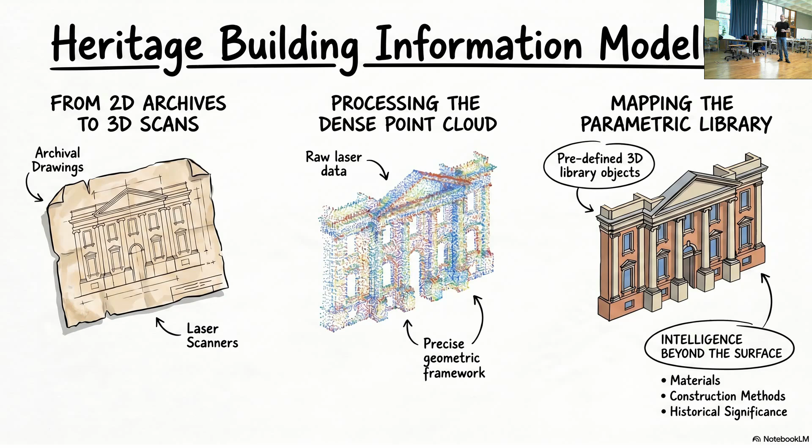So basically we have two-dimensional archives, like drawings, and 3D scans using raw laser data like point cloud. We basically turn it into predefined three-dimensional library objects. So we create a parametric library, and then we add materials, construction methods, historic significance—those kinds of things—into the model.

So let's start. As you know, standard BIM methodology has digital representation capabilities, so we use it to document, conserve, and manage historic structures. So what do we need to do with a historic building? We need to document—capture what is there. Also, we need to find out information about that.

For instance, for the Faculty of Architecture building—this is a relatively old building now, 60 years old—we can go and find the drawings, we can go and scan the building, and create documentation out of the existing building. Then we can figure out what we need to do to conserve its current state, and how we can manage the building so that in the future it will last longer. That's the idea.

So with standard BIM, we have the digital representation of the physical and functional characteristics of buildings. We define the size of elements, mention the materials, and represent the building digitally in a way that follows a standard format. And it's used for decision making—BIM is all about decision making, in the construction process or prior to it.

That's custom mapping. Normally, what they do with laser scanning—for instance, Kemal Abi or Filiz Hoca—they do laser scanning, and with it they create two-dimensional drawings. That's all they can do now. This is what we are trying to avoid, right? With BIM, we don't want 2D drawings. They are useful, they are good, but it's not what we want.

They basically create a laser scan, then they take slices. So they take a slice at 1.2 meters to draw a plan. They take a slice to draw an elevation. Or, in the best case, they use that scan to create a 3D view, a 3D model.

But a 3D model is only an empty shell. It's not something that is enriched like we do in BIM. They capture surface geometry without underlying data. You capture the surface, but you don't know what is behind that skin. You create a 3D skin out of points, but you don't know what's behind, and you don't care about it in traditional historic documentation.

This is not what we want. With Heritage BIM, we create smart parametric objects, digital elements. They're defined and altered by specific parameters and behavior rules, the same as with BIM. We create a wall, we create a window, and they are parametric. They work as they should.

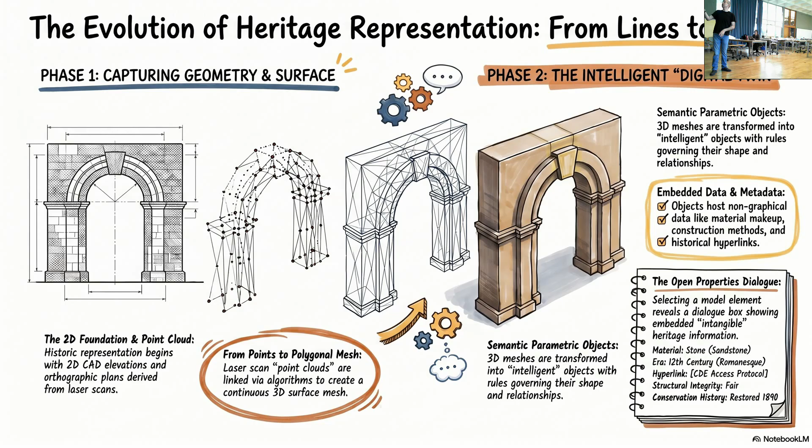Basically, the Heritage BIM model becomes a central collaborative repository, which means that with the Heritage Conservation Project, we have many partners, many stakeholders. We have engineers, historians, architects, restoration professionals, many different people. We have the public, the Ministry of Culture, the municipality, the general public - they are all involved.

We basically create a spatial model, like the geometry, but we relate it to other pieces of data, like the history. So it is also a federated model - exactly, but now we are not federating the structural engineer, mechanical engineer, we are federating, for instance, oral history - people telling their experience about the space, video recordings, sound recordings, posters from events happened in that location, drawings. There are all kinds of different data. So we still have data, but it's different - it's about the history in this case.

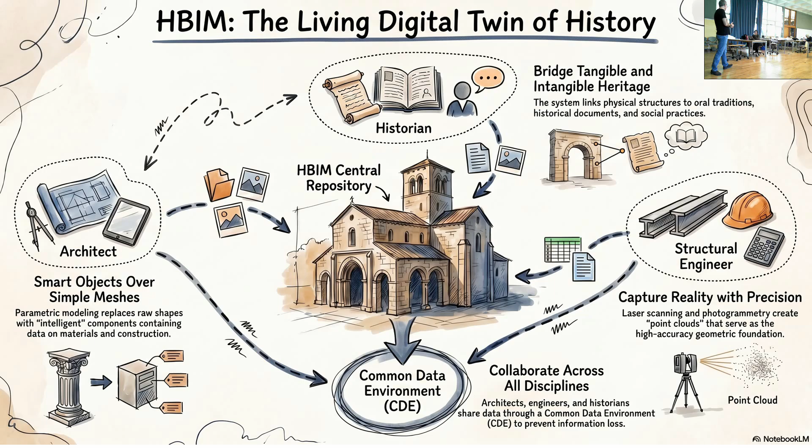But the common data environment for Heritage BIM is not that standard. There are many different Heritage BIM projects ongoing all around the world, and everyone is trying their own way of doing it. Because it's a very niche, new area, people are programming their own common data environments.

And of course, we want to use it for long-term life cycle management of the buildings. The Heritage BIM model can be used for preventive maintenance, energy efficiency retrofits, or if there is going to be a physical intervention, we can use the Heritage BIM for that.

Also, the structural deformations, we can follow them, like what's happening in time. How do these pathologies change in time?

This is what we do in the summer. In Italy, I run a summer school with some friends from Italy and Spain. Every summer we take one building and we focus on what's happening with that building, with the structural concrete, and how it deforms in time. Then students, like last summer Eleanor was there, basically look into using those observations and convert them into a BIM model. This is something that I also show in the tutorial.

So it's useful because we can also use it for virtual tours. Now, because we have internet, we don't have to rely on people coming and visiting in person. We can convert all our cultural heritage because it's environmentally better actually.

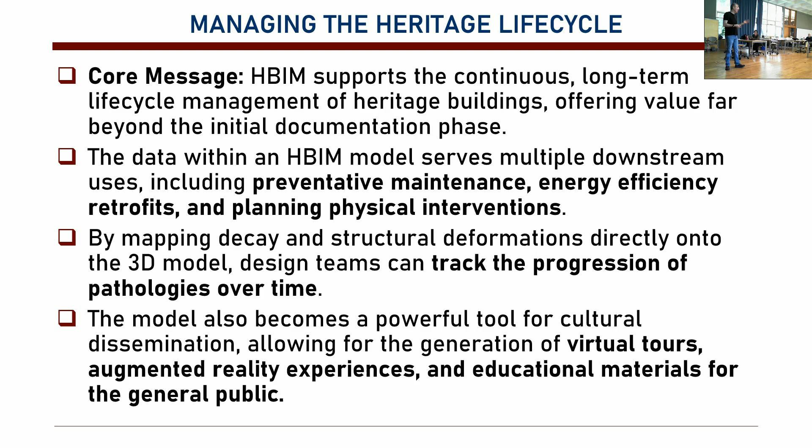So education, materials for the general public. The general public needs to be fed. So this is what we want.

So we basically scan, we do basic data capture, we do diagnosis, we make predictive modeling out of that, we do intervention planning, we do maintenance tracking through the life cycle, and then we also do cultural dissemination. This is what we call it, with the virtual reality, with the 3D models, with the websites, there are all kinds of ways to do that.

So the common data environment in that case basically turns tangible geometry and intangible history into something that supports the survival of the building. That's the idea. But of course, the way we do Heritage BIM is challenging.

We also need to train professionals, because when you think of the standard BIM libraries, they are standard. You cannot just put a regular window in an old heritage building model, because it will not fit. So the standard BIM libraries lack the complex heterogeneous components, which means that we need to create custom parametric families from scratch for heritage BIM.

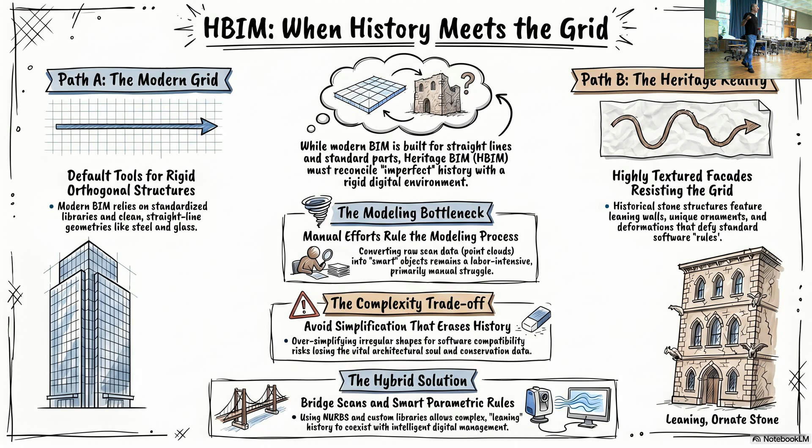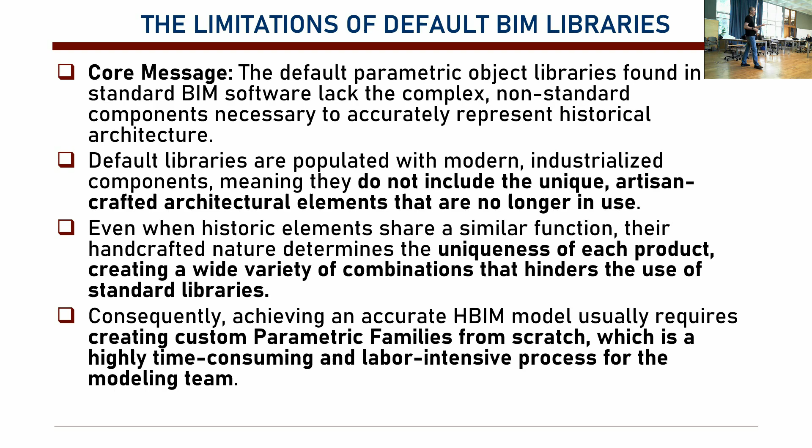This means that when you scan and receive data—let's say there's a timber beam, a timber post, an adobe brick wall—someone should be modeling it piece by piece. Modern buildings are straight and nice, but heritage buildings are complex. We need to deconstruct them piece by piece and simplify. For each unique element, we need to create a custom parametric family, and this is the difficult thing with heritage BIM. With regular BIM, you simply define dimensions, etc. With heritage BIM, you need to figure out how it's going to work.

So you don't have a Corinthian column head. It needs to be somehow turned into an object which is parametric. Sometimes this is the difficult part, but this is why this is a very important field. We have some AI algorithms, but they don't really work correctly, so we need to find ways to simplify this. People are still researching, so if you're interested in historic buildings, this could be a field for you to stay relevant in terms of technology.

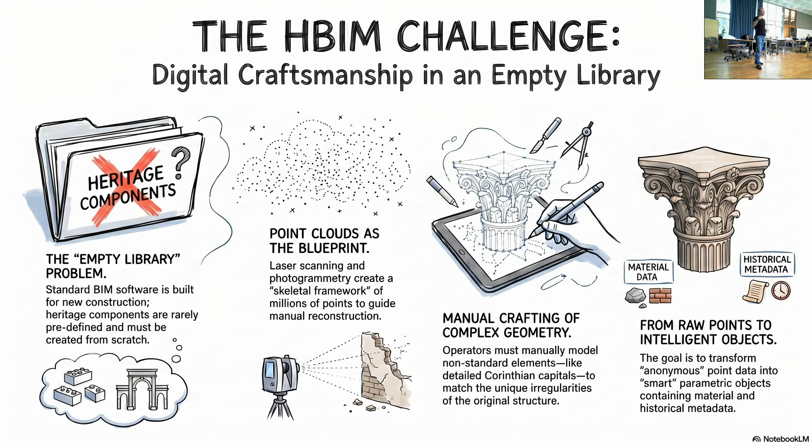That is, for instance, creating that complex but parametric representation of the actual point cloud. Most BIM software have very simple 3D geometry tools, as you know with Revit, and we sometimes use other software. But we basically try to idealize things in that regard. It's difficult, so we have to figure it out.

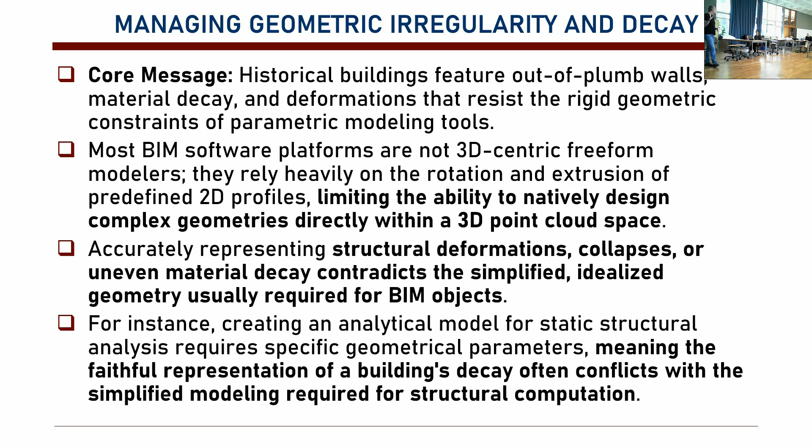So this is the reality. We don't want to put it that way, but it could be something like this, for instance, something in between, middle, hybrid ground. Because this is the actual building, this is the actual wall. The point cloud gives us a perfect image, but we cannot simply say there is a simple wall, because it erases the historic value. We don't want that.

But we want to find a middle ground, because we cannot put it like this into the BIM. This is the middle ground. How do we find the hybrid middle ground? With extreme geometric accuracy, we cannot do that. Oversimplifying is also a problem. So we need to find the intended uses of the model.

The question is, what should it be? Could it be just a simple wall like that, or could it be like this, or something in between? How do we define that? We need to be able to define that. Level of information need here is important. We have to define it.

Do we look for semantic richness? Do we want geometric accuracy, high fidelity, or do we want parametric behavior? There are these three different use needs, and we have to balance all that. Sometimes maybe the semantic content is more important, so a simple representation is okay. But let's say it is...

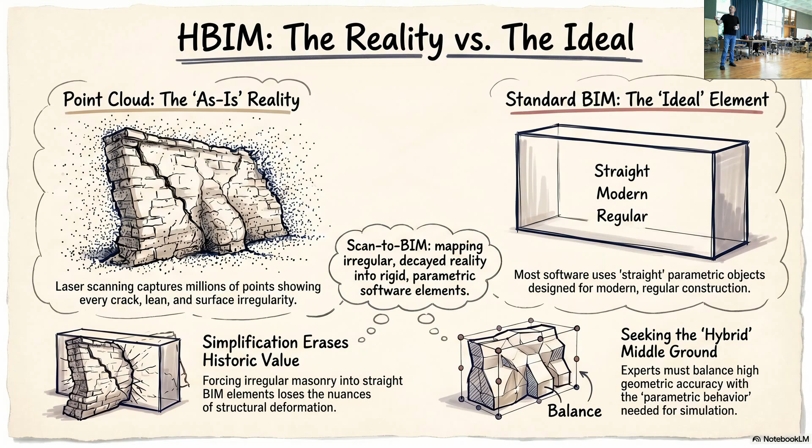Rhino, right? You can use Rhino to model that wall and then bring it to Revit. So your laser scan feeds Rhino. Rhino is used for simplifying geometry - there are many algorithms that can create meshes out of point clouds. Then you can simplify those meshes, turn them into this blocky representation. This one has something like 200 faces instead of millions of points - 100 faces is okay, 200 faces is okay. Then you create that in Rhino as NURBS, and bring it into the BIM environment for heritage work.

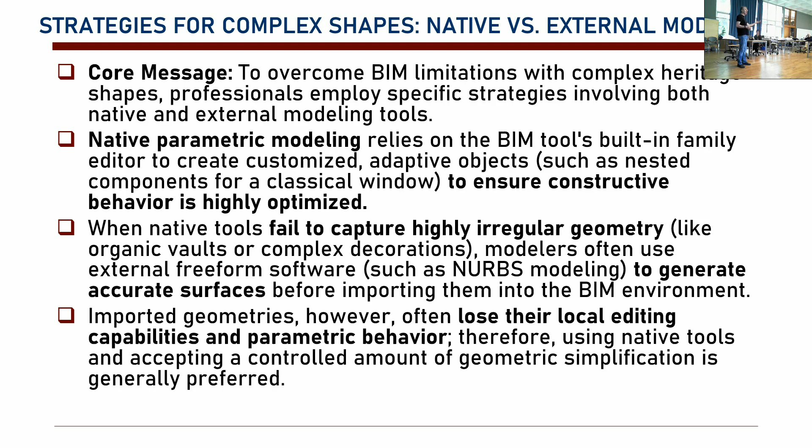But the problem is, if you bring it there, you cannot edit it anymore in Revit. So this is the issue - it becomes a fixed element. But the question is, are you okay with that? You might say, well, I have the workflow fixed, and I can just continuously create all kinds of objects, bring them into Revit, and then put the wall property into that object. It becomes a wall. I can put the material of that object there, and it just works. Why not? Because with native parametric modeling, you can only do a few things with the wall.

But with NURBS modeling, you can do all kinds of things with the wall. Then you bring it to the model, but it's locked.

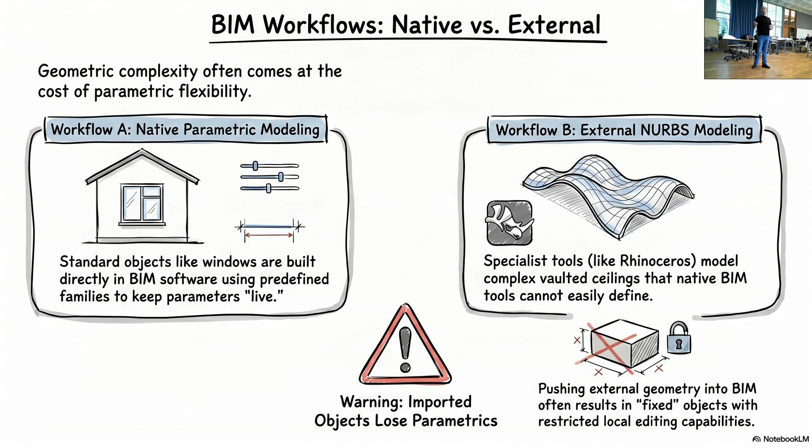That's the idea, okay? Now let's talk about reality capture. Reality capture is, of course, why we can do this. Without reality capture, we wouldn't be able to talk about heritage BIM, okay?

It's not new. I remember very well when I was a student in the US, in year 2003, I was at a conference and they were showing us how we could use a laser scanner to capture spaces, and they were working on how to convert that laser scan into a model. That was like 23 years ago. I don't know, you weren't born.

2003, okay, yeah, 2003 they were doing that, which means that we basically collect first the legacy data. We collect data about the building. We look into archival documents, like old drawings, blueprints, historic accounts. This is important because we want to figure out what happened so far.

Like we have this mosque, and we know that it was initially a temple, a Roman temple. That Roman temple turned into a church, then it was turned into a mosque. So then we have these time milestones in the life of that.

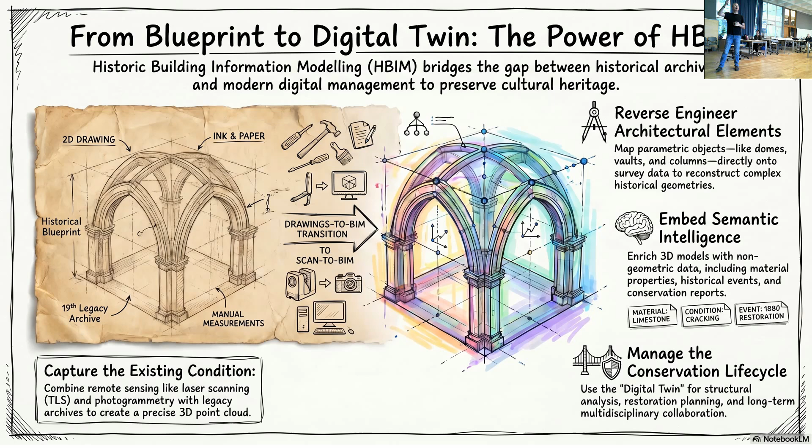Okay, of course we use terrestrial laser scanning (TLS), because it gives us a millimeter level 3D model. We have point clouds, and that point cloud accurately maps the complex irregular surfaces on the building. Perfect. But the problem is with the laser scanning.

The limitation is you need line of sight. So if you want to scan this room, especially this waffle slab, you want to be able to see every point inside that, which means you cannot have one laser scan from one room. We want to have 1, 2, 3, 4, 5, 6, 7, 8 - like this room needs at least 8 to be able to see everything. Even then, you won't be able to see everything. What, for instance? These pipes - you cannot see the top of these pipes because they just cannot work.

So this is a problem, and also, of course, it's expensive. A laser scanner costs like, I don't know, 100,000 euros today, 300,000 euros - millions of Turkish liras. And you need not just a scanner, you need a very high capacity, high capable computer with a very high-end graphics card, CPU, memory, etc., storage space. And then, of course, you need time, and you need trained people. So it's very expensive.

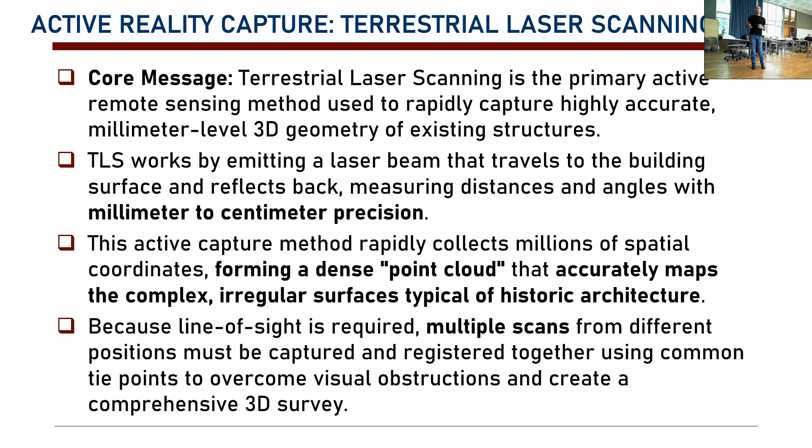So what is the alternative? Yeah, this is how the laser scanner works, right? So the laser scanner sends a laser beam, then it measures the distance. Remember I showed you my - do I have it here? I think I have it.

Just wait. Yeah, this is a very simple laser scanner. See that? So it is like a laser pointer, but this is a laser one-point scanner. Because it takes - now it measured 4.55 meters. So a laser scanner, the way it works is...

it takes millions of measurements, 360 degrees. It turns around, takes millions of measurements with a device like that. This works with - there are two different technologies, time of flight, and what was the other one? I forgot. And the scanner works that way. So it basically, you can measure - with this one I can measure even that, 15 meters from here. So it takes like a 100 meter long shooting of laser beams, and then millions of measurements captured into a single file.

That file we call a station. So every point where you take millions of measurements is a station. And you take like 5, 6, 10 stations, and then the computer matches these points with each other, relatively to each other. Then it places them in 3D space.

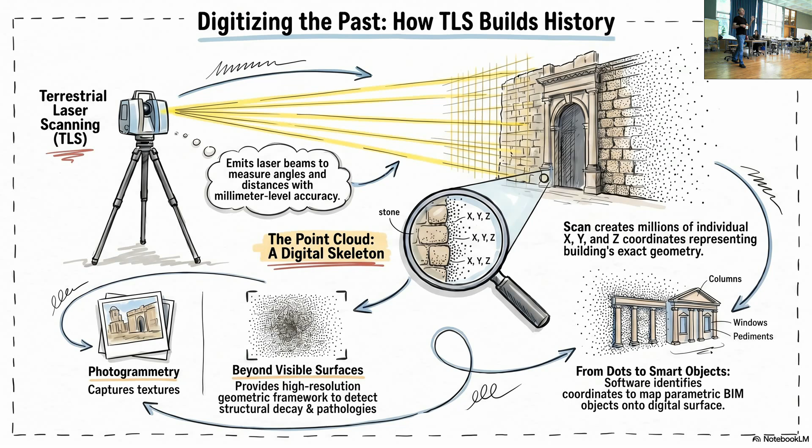Okay, then it confirms that they are perfect. And this is how you end up with millions of points. So what is the alternative?

Photogrammetry, particularly today we call it digital photogrammetry, structure from motion algorithm. This is the technology that I use. The idea is that with TLS, as we said, you're taking measurements for a point, and there is this need of line of sight. It doesn't work great in that regard.

But with digital photogrammetry, you take many photos with different viewpoints and different angles. Another nice thing is that the photos are high resolution, nice photos which also capture the texture, the color, the actual state of the building. It's used for material decay, cracking patterns, all states of the building.

And we use drones today. Drones are important because they can fly over the building, and you can take photos from points which you cannot access with the laser scanner. There is no way you can raise the laser scanner and keep it stable enough to take measurements from height. There are only LiDARs today, very similar to laser scanner but not that precise, which you can connect to a drone. That's one way of doing it, but normally we cannot do that. So drones are very important, and you can reach areas which cannot be reached with laser scanners.

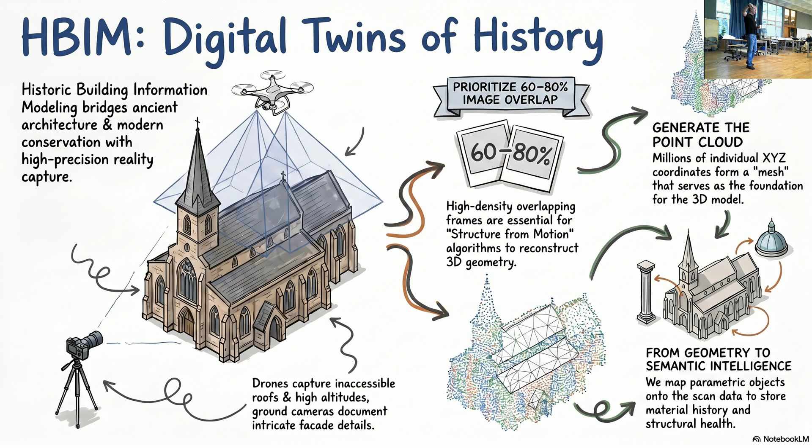It's used mostly for objects, but you can do that for buildings too. There's also Agisoft Metashape, I think it's called. That's a Russian software, another very good one. With that you create point cloud, and also you can create geometry from that point cloud. I'll show you how it works quickly in the tutorial, the first few minutes.

Then there is this hybrid data collection. You can use laser scanning first on the ground to make sure everything is perfect and aligned, because laser scanning is precise. Then you use drones and photogrammetry, combining them together. One of my students did her master's thesis on that. If you're interested, you can look at Ecem Kulübeci. So basic geometry measurement can turn into deep diagnostic understanding of the building's health.

So, the hybrid point cloud, hybrid BIM. TLS plus photogrammetry basically combines the best of both worlds. So it's a good idea to have both of them.

Now, how do we do this? If you scan both with laser scanning and digital photogrammetry, you end up with things you don't want, like trees, vegetation, objects, people, cars. You have to filter and clean them to isolate the building. Then you create polygonal surface meshing, triangulation, and as a result a photorealistic textured 3D reference model. The point cloud has all kinds of things, but you want to get rid of them.

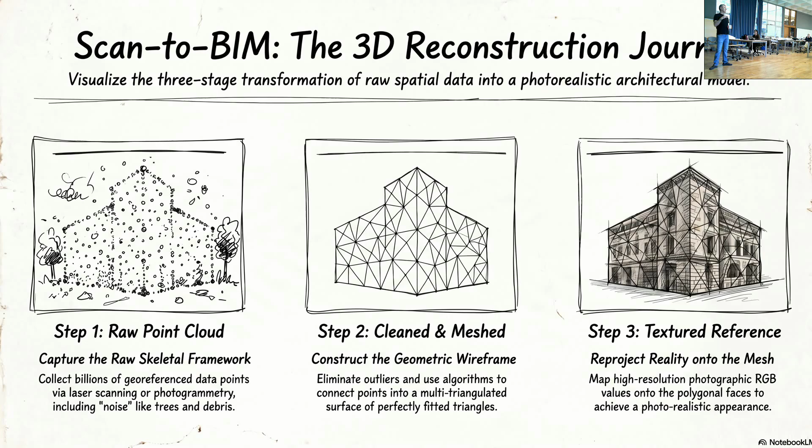Okay, and then you clean and you mesh, and then you create a textured mesh reference, which is coming from the digital photogrammetry. Now, what is a scan to BIM workflow in that case?

Basically, we take the reality capture data and then we convert it into a parametric building information model. Because the scans, the photogrammetry results, the point clouds, they don't have any semantic data. There are only billions of spatial coordinates. So scan to BIM means we are bridging this gap so that we are creating computable object-oriented BIM elements. We do data acquisition like the scan.

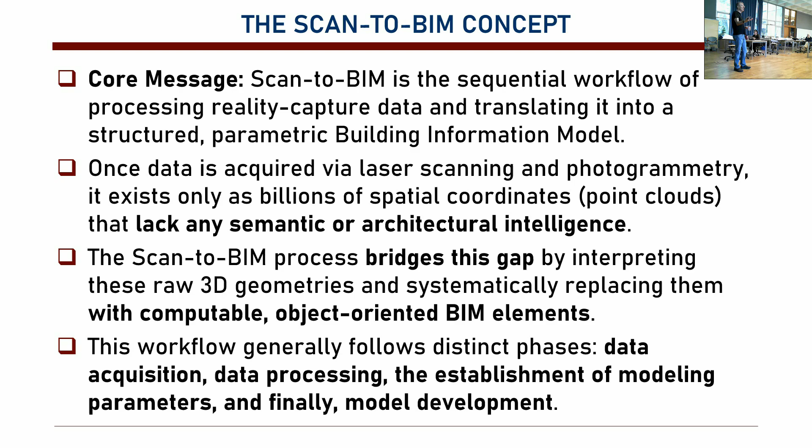Then we do data processing, like the scan is converted to meshes. Then we establish the modeling parameters, like how do we want to represent it? What is the simplification process that we are trying to follow? And then we develop the model.

We have the drones, we have the scanner, we have the mesh. Then we turn them into objects. Then we create the BIM model. That's the idea. Okay, so it looks simple, but it's very difficult.

It takes so much time. Sometimes, like for this column, you can spend like a week, maybe two weeks. With a regular BIM model, you can do it in a few hours. A model of this can take a year or two. So it's not easy, but the results and the benefits are amazing.

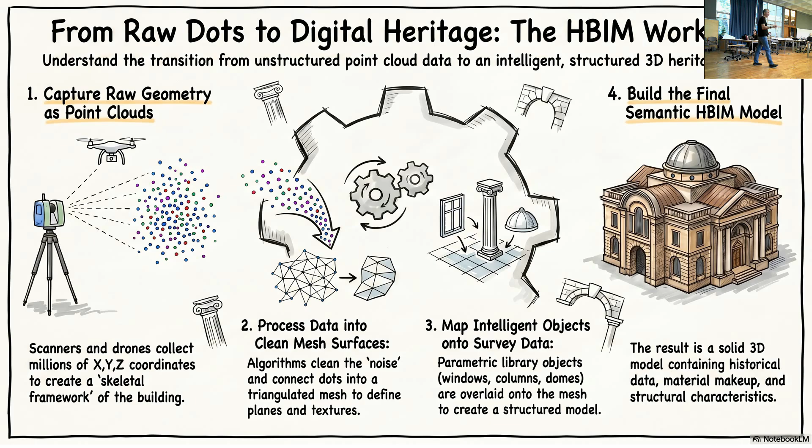So this is why I'm telling you this is a great future direction for you. This also means money. If you are putting a lot of time and effort into something, it means that you can charge more and get more money.

Yeah, of course we have to do aligning, registration. This is all about scanning and photogrammetry. We have Poisson surface reconstruction, triangulation, all kinds of different methods. I'm not going to go into that. But you basically create a mesh point out of that.

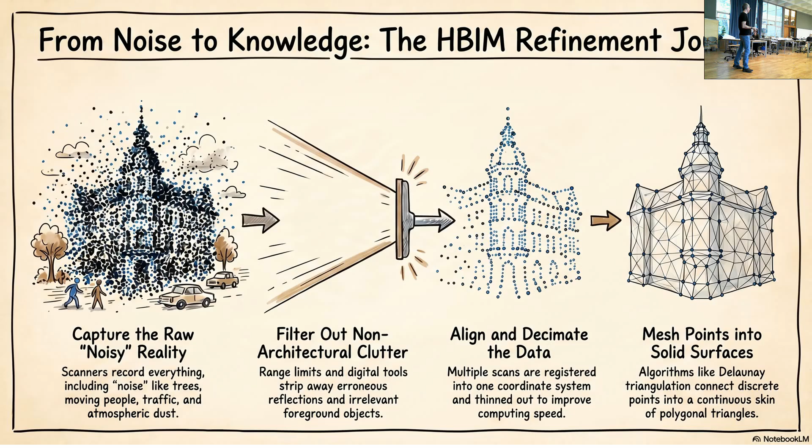And then you slice and extract profiles. Remember I was telling you, Kemal Abi takes slices and then creates the planes. What we do is use the slices to create different levels of planes, connect them, and then create the objects out of those several slices. That's what we are trying to achieve.

There is this level of accuracy, okay? The concept, which we will not go into much detail, but level of accuracy - how much level of accuracy you want to achieve.

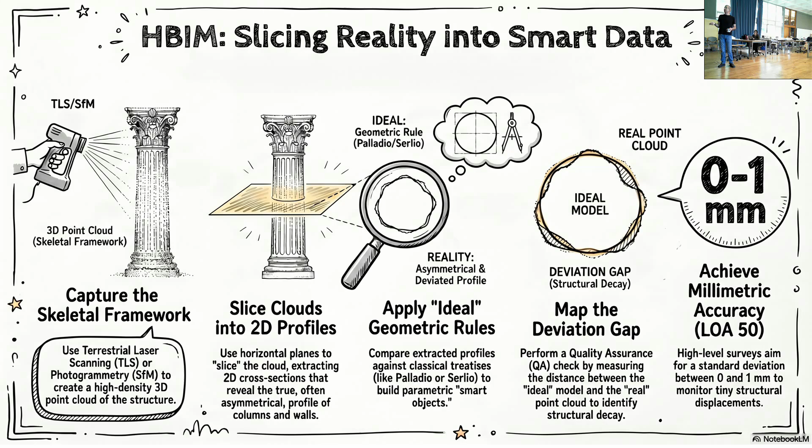We map the parametric objects into the point cloud and figure out how much deviation we have. And that deviation is also represented with colors. Like this is, you simplified the window, but this is the real window, and in between there is this like few centimeters deviation. I also show an example of that in the tutorial. So that's how it works.

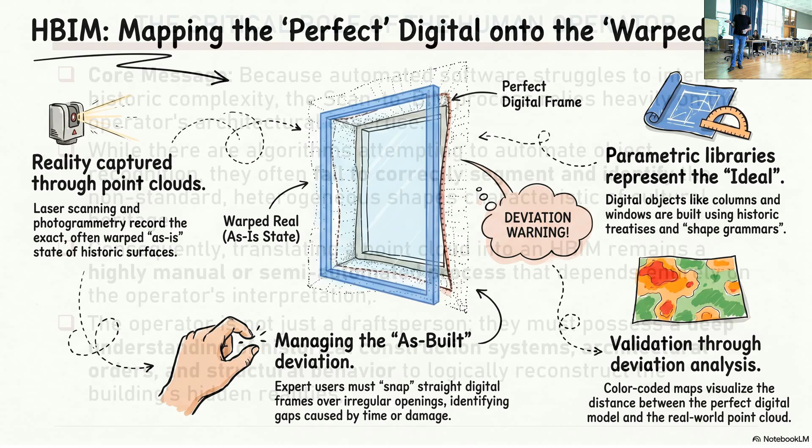Of course, this is a very manual or semi-automated process. There's a lot of human intervention. This is why it's a very interesting HBIM field, because that person is not a drafts person. That person should understand historical construction systems, architectural orders, structural behavior, so that the model makes sense. The model, the modeling process, is an intellectual process. It's very difficult and it needs a professional to do that. It's not a draftsperson's work.

Yeah, you take this wall piece by piece, you basically define the wall. So as an individual, you use your expert knowledge to create this 3D model. So that's very important.

So now, finally, once we have that data, how do we manage it? As I mentioned at the beginning, there is no one standard way of doing it. People are experimenting. They are paying computer engineers, computer scientists to design different interfaces, databases, resources.

Is there any IFC option? Yes, I will talk about that. There is also an IFC option, and we still rely on IFC for certain things. Especially, as you said, if you're dealing with that interface, there should be a common language, and that is IFC in that case.

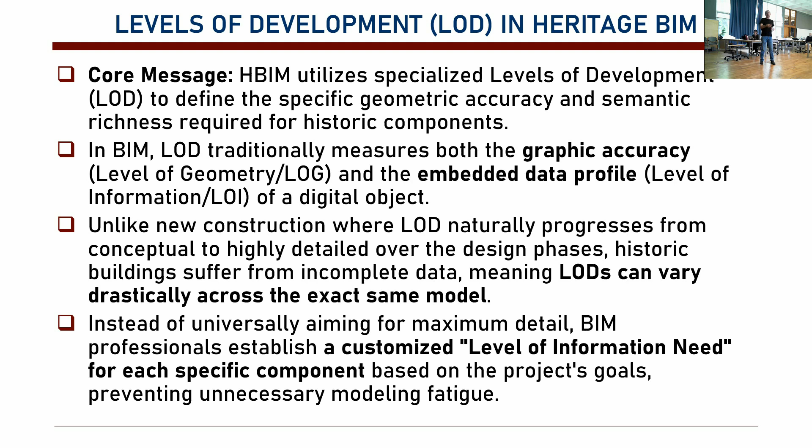The building is there, there is no time, right? But then you focus on the object, like how much do I want to represent, in what detail do I want to represent this? In what detail do I need this? So level of information needed for each element needs to be established. You can say this wall is very critical, very important, we have to focus on that, then you can make it more detailed.

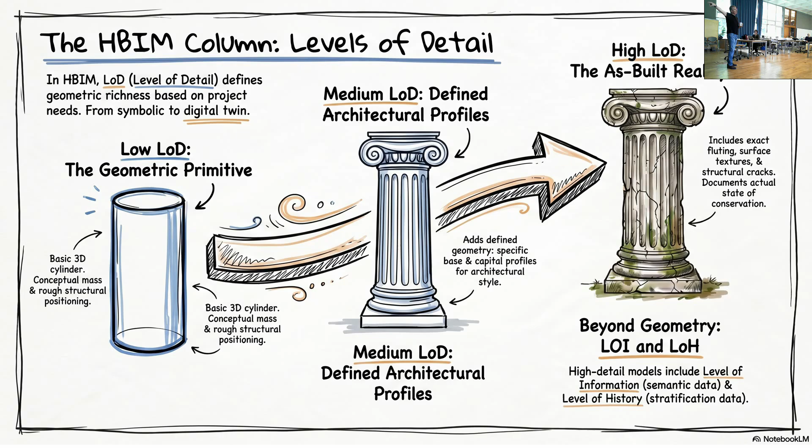And in that case you can even do something else, because when you have the laser scan points, the point cloud, let's say that point cloud is 1 terabyte. Then if that wall is very important for you, and you might say 50 years later I really want that point cloud, you put that point cloud in a data repository, simplify the wall, because you cannot put 1 terabyte into your BIM model, and then you put a link to that 1 terabyte data through that wall. You say this is here, but if you want the highly detailed point cloud, you can reach it this way. That's how it works.

So level of history is another thing. How much level of history do you make? Level of reliability, how reliable the history is. You can define that, like is it coming from a reliable source, is it coming from confirmed resources, etc. So archival sources need to be vetted. You can say, well, we don't know much about that, it is yellow. We know very well, green. We don't know anything, hypothetical, it's red. So you can even color code your project in terms of the sources for history data.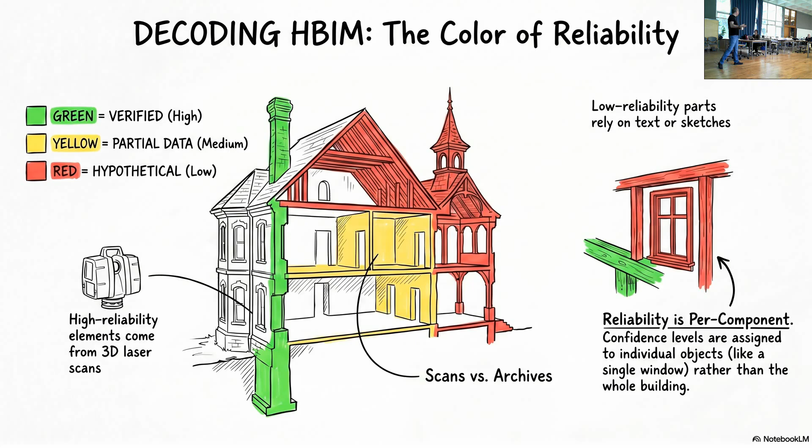And of course, the 3D database is enriched semantically. How? We use documents, PDFs, historic photographs, material analysis, diagnostic reports, continuous monitoring of the situation, the temperature, humidity, cracks, vibrations, the number of people visiting, carbon dioxide levels, all kinds of data that you can feed into the model. As a result, you can retrieve the stratigraphic history, material makeup, and past maintenance records of the building.

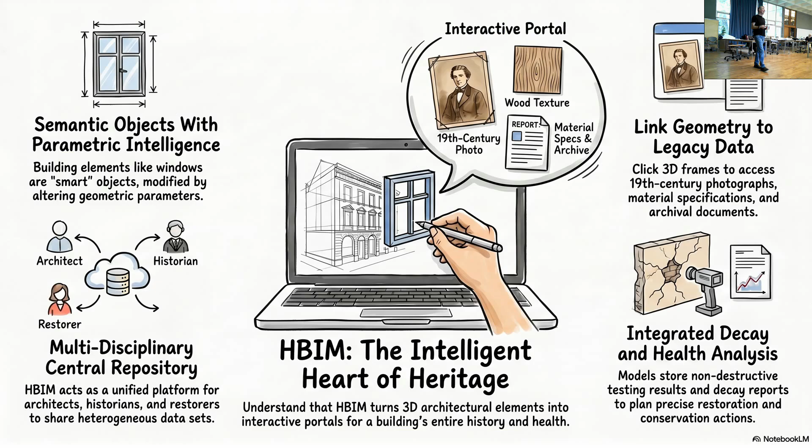That's the beauty of heritage BIM, you can use that central database for everything. And of course we can use IFC because we can talk to different professionals, structural engineers, conservators, and IFC format can be used for that database too. The nice thing about IFC is that because it's an open format, it could be directly related to the database created by the software engineers. So it's an open standard database that we can use.

And it can be used for lifecycle management. This is another thing. We do restoration, reconstruction, renewal of the building. But what's going to happen after 10 years? How are we going to find all what we have done, and how do we know what we have done was good or not? You make interventions, sometimes they're good for the building, sometimes they're not. Sometimes you use the wrong material, sometimes you've chosen the wrong methodology. So basically, you can go back in time.

It's also used for cultural dissemination, as I mentioned before, virtual reality tours, augmented reality apps, interactive museum exhibits. You can create a VR or AR scene or exhibition. When someone enters the building, it immediately converts the building into its past state. Or when you walk through the antique town of Ephesus, if you put augmented reality, it immediately converts it into how it was in the past, overlapping the information on existing ruins. This way, if you present the history nicely, more attractively, more people can come and you can charge more money and use that money for sustaining the facility, as long as you keep people in order and don't let them damage the history.

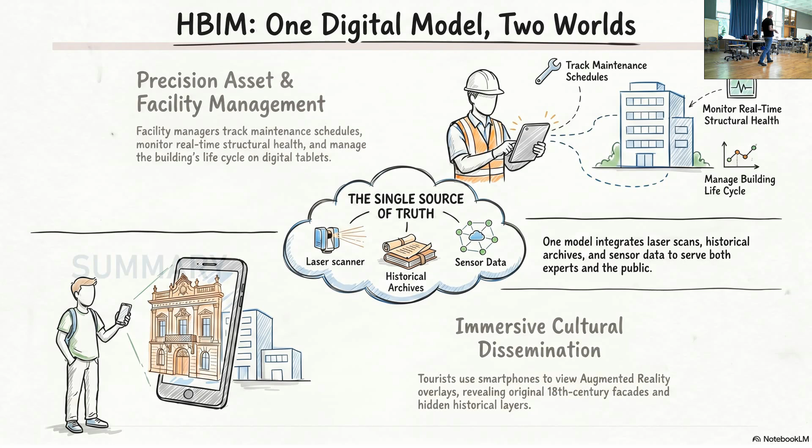So with one digital model, you can do cultural dissemination, you can do precise asset and facility management, like we always do. Let's summarize: heritage BIM is all about complex, irregular historic data.

Complex, irregular, crude buildings, old buildings, leaning walls, completely difficult. And then we turn them into structured parametric digital twins.

We create a digital twin of what is happening, and then we also use it as a multidisciplinary tool for long-term conservation. Heritage BIM in that regard bridges the gap between raw reality captured data and the semantic 3D databases.

Basically, we need to find ways to overcome the software limitations. Like if you're using Revit, it's going to be difficult, so you have to find a way to overcome that. So we have this dilemma of geometric accuracy or parametric behavior. How do we go in between these? We have to be careful about that.

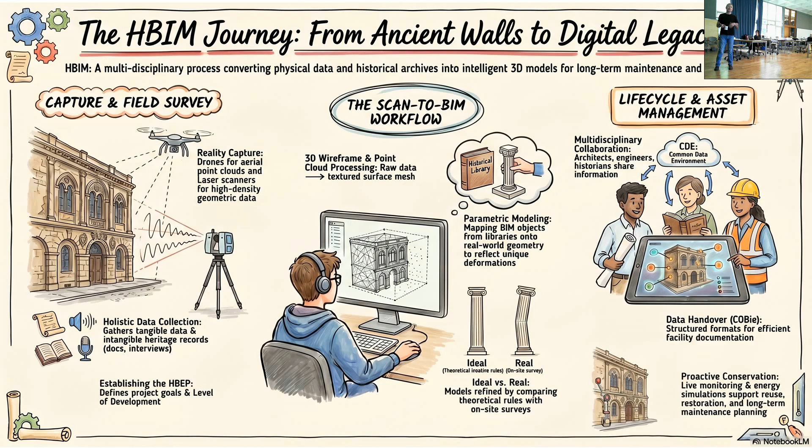And then, of course, we need to look into level of history, level of reliability, transparently documented historic phases. Then we use IFC for standard representation. So this is how it works for future needs. I think this is it. So we capture, we scan to BIM, then we basically manage it for the rest.

I'll quickly show you one thing, and that is our Faculty of Architecture building also has a Heritage BIM model. It was done by İpek Hoca and her student, I think in 2018.

Sorry, I'm going to just remove this. Where is my thing? Yeah, here we go.

Metu Kim project, Keeping It Modern project. The project was managed by Professor Ayşen Savaş, and in that project they received a grant from Getty Foundation to document the Faculty of Architecture building. Our building is one of the 100 modern buildings in the world who received that grant. So in that regard, this building is very important. Keep it in mind, it's beautiful, it's very important.

Let me see, where do we have interact? Yeah, that's where we have it. So this is the models that they created. Let me see which one, I will go to this one.

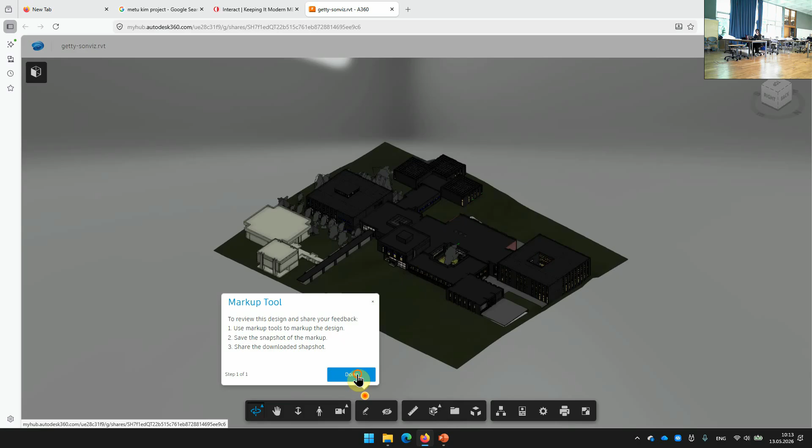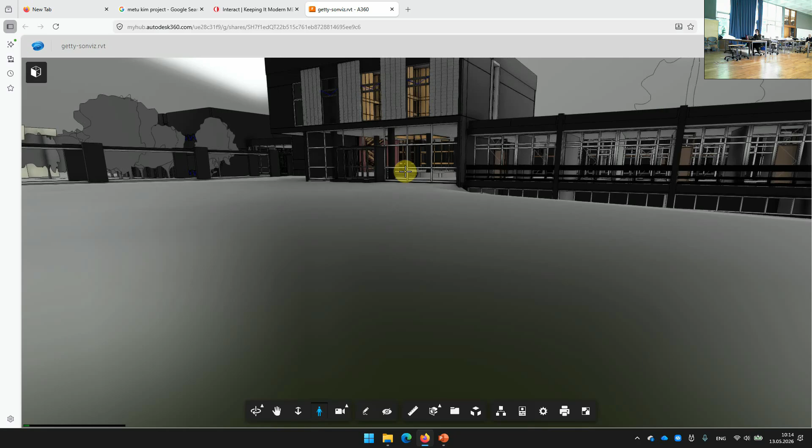Now this is the building. What I can do is I can go first person, and then it basically makes me jump. And then I can walk. If you are a computer gamer, probably it's going to be easy for you. I'm going to be using my mouse key.

See, this is the BIM model they created of the faculty. Let me go through these walls. I'll show you something. Okay, let's jump. So this is Göbektaşı.

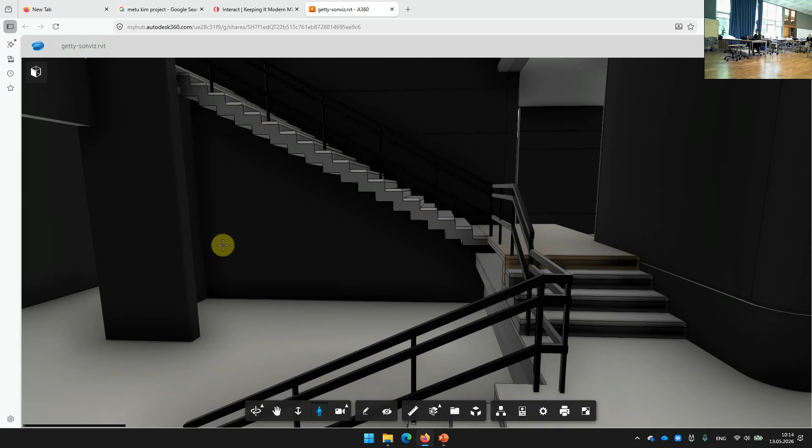So this is how, as I said, every team uses their own methods for representation of data. You see these balls or spheres, they call them the flying spheres. These spheres are there to connect us to the documentation. Use Control key and click.

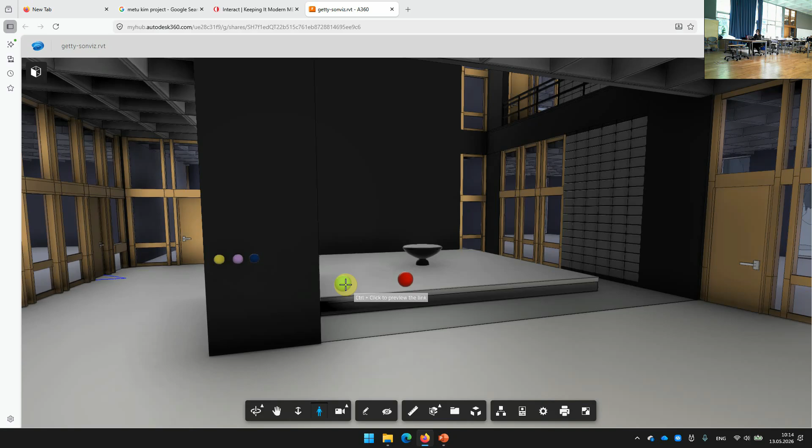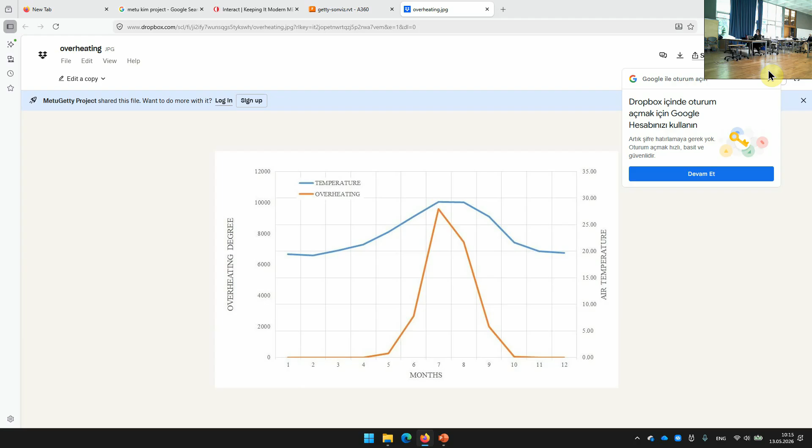Here it takes me to an external link, a Dropbox link. If I click View, what does it bring? Let's see. It brings me the data about the temperature changes. Or if I click on this one, open, let's see what it is. We see the drawings, original drawings of the space, see?

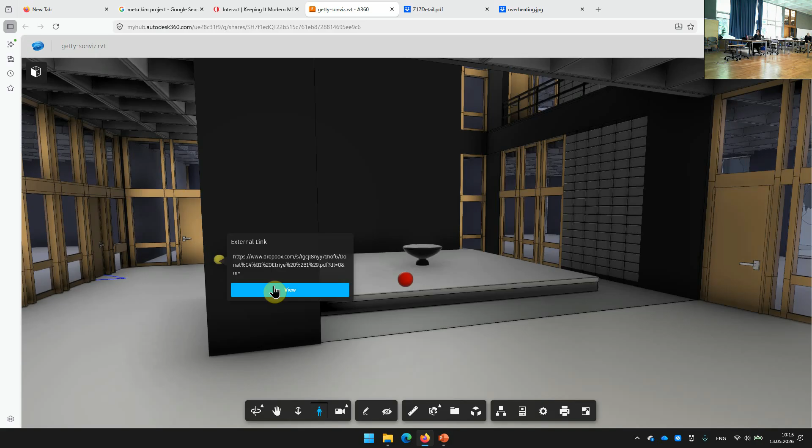Let's go back, let's click on this one. Open. This shows me the reinforcement that they used, some ground penetrating radar. What is it called, Eren? It's called ground penetrating radar, the radar that you used last summer for the reinforcement bars. Was it Georadar? Georadar, it's called georadar. So basically you scan the reinforced concrete wall, and it shows you where the reinforcements are, and then they make a drawing out of it.

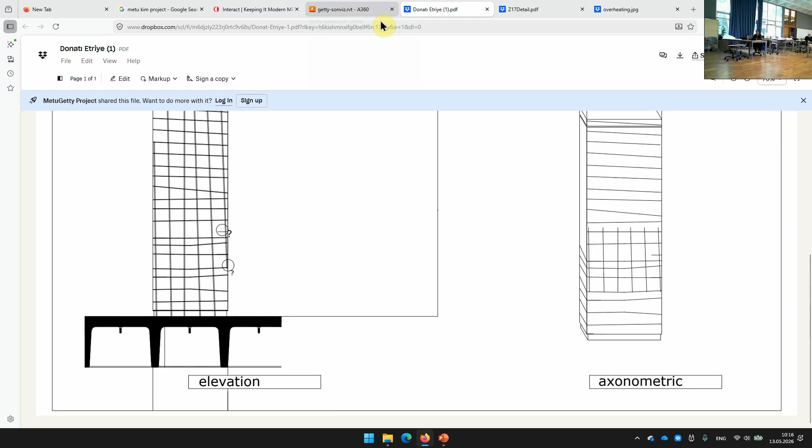You see, and we have the drawing there. Or if I click on this one, it brings me to the measurements. And how about this one?

They took some core drillings. This is like a core drill to figure out what's inside the concrete.

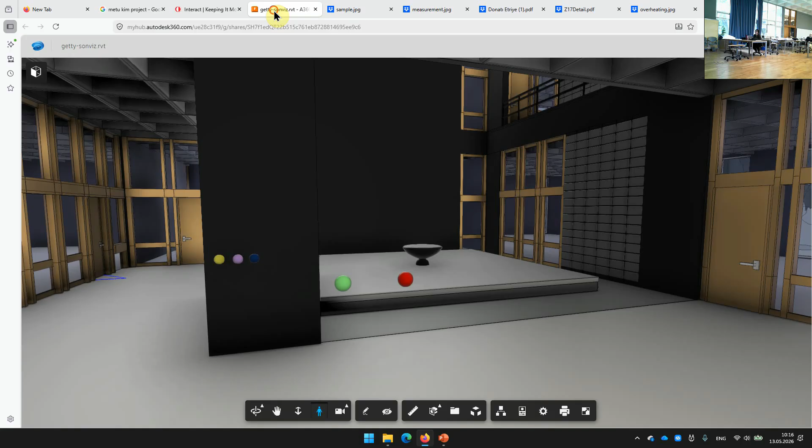Let's look up there. There's two more. This one, there's a crack there. If you look, there's a device measuring the cracks, and it shows us how the crack has changed over time. And there's another one, that's again some measurement.

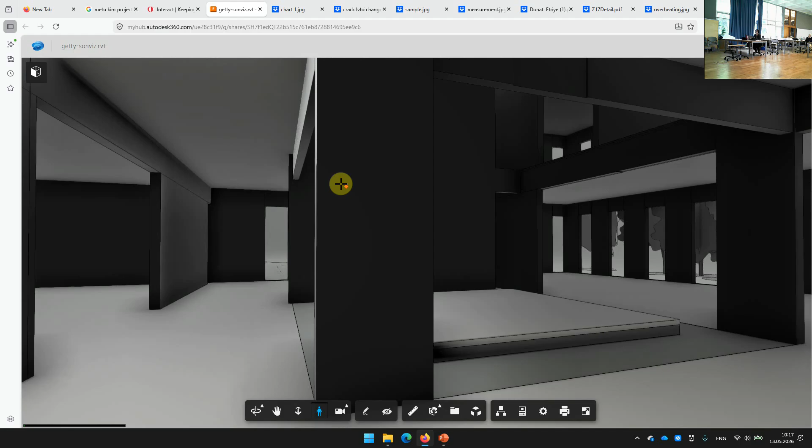As you can see, these walls, doors, and windows are very idealized, very simplified when you compare. But the question is, what is critical? For this building, what should the BIM model be like?

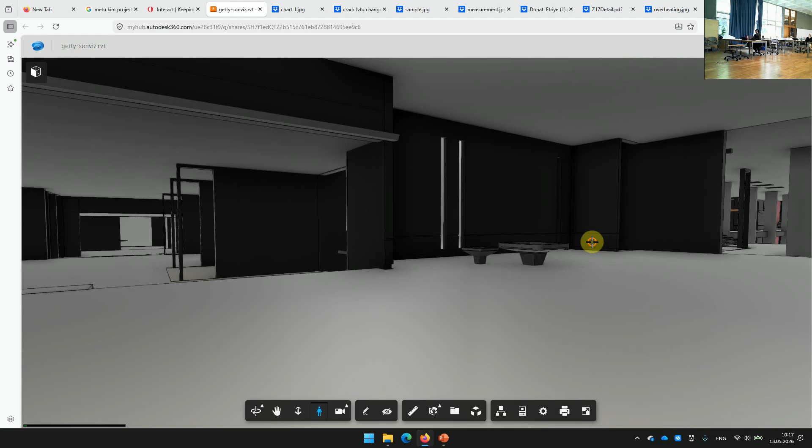Let me see, I think there was a door which we could look at. There was also information about that door. I think it was the door at the basement here.

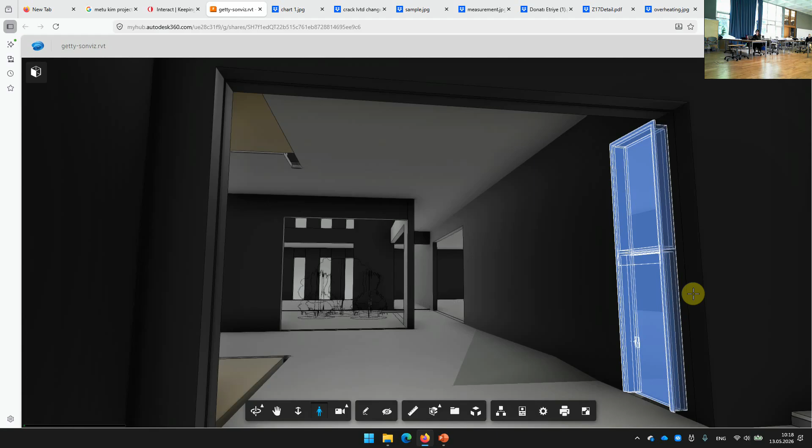This is our studio where we are, but I think one of the objects, was it this one? No, one of the objects was also linked into some historic things.

You can go and play with it. There's another one, served at Autodesk 360. I still don't understand how it's still being served without being cancelled, but I don't know. This was done in 2018 or 19, I'm not sure. And there's this one.

Continue, let's see. This one is rendered, it's beautiful. Let's see if it works.

This was done by İpek Hoca and her student. What was his name? Şahin Akın, yes, Şahin Akın did it. He's now living in Norway, I think, or somewhere in Europe.

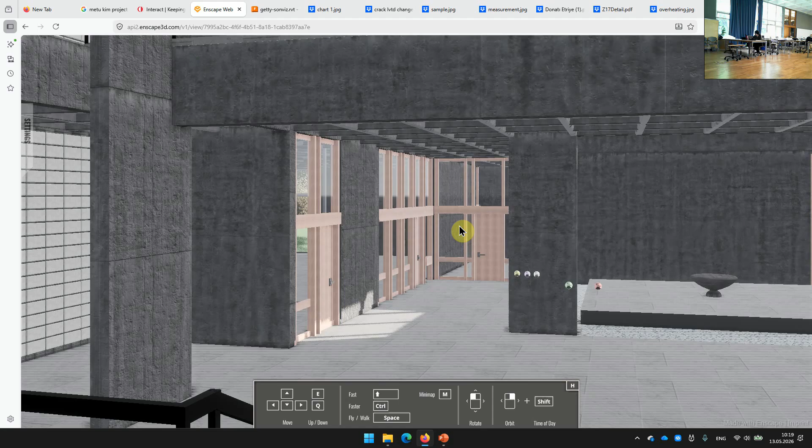Yeah, this one is fun too. As you can see, this project was of course limited. They don't have a database of objects, only some links to Dropbox folders. In reality, what we need is an interface that you can access all kinds of information, material, documents. You see, this one is texture, but here the problem is they only have one concrete texture repeating everywhere, so it's not very realistic, it's very simplified.

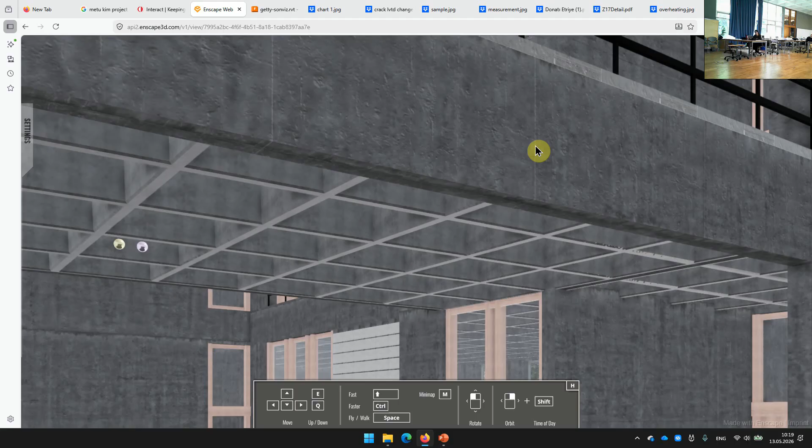But of course, the question is, how should it be? It's the same concrete texture, as far as I know, it's being repeated.

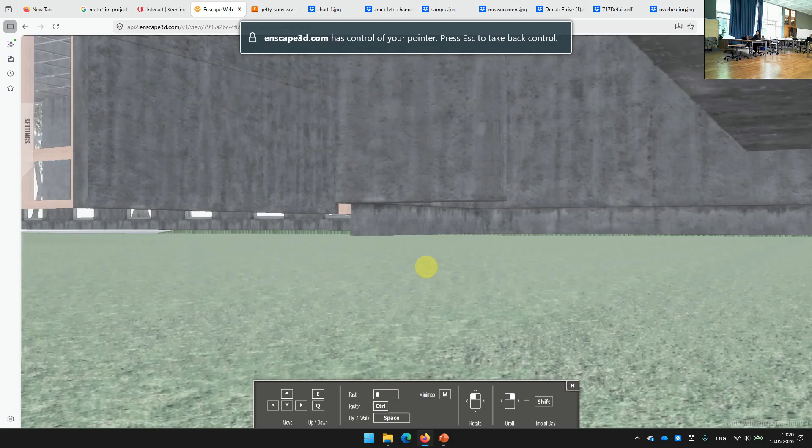Can you orbit, see the early version of the Kubbe Alpha, hocam? With this one, no, I don't think they did that. I'm not very good at this. I'm underneath the floor. How can I zoom out? Yeah, here we go.

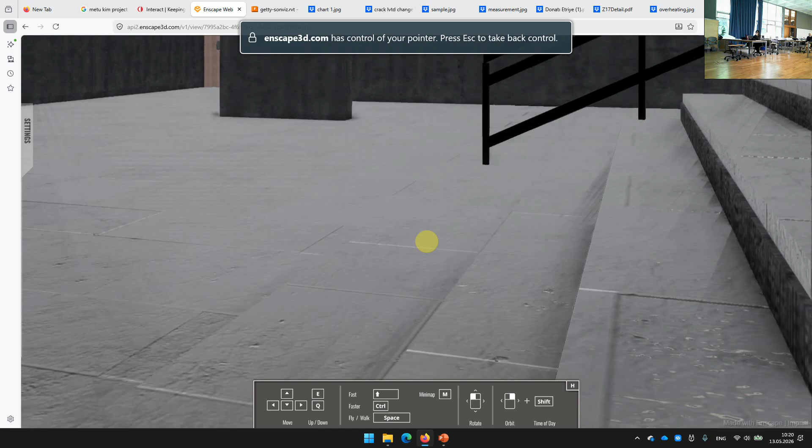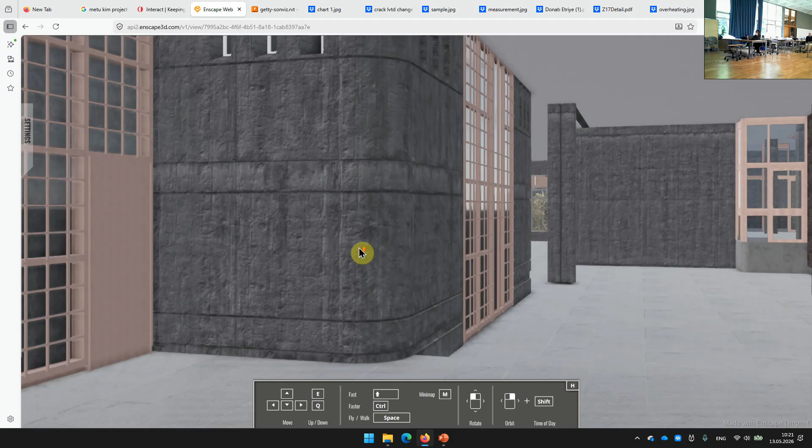For instance, this is a very good suggestion. Like normal with BIM, with Heritage BIM, you should be able to see what the Kubbe Alpha was like originally. Now all we have is its current state. This is a good suggestion. This is the current state of Kubbe Alpha, but this is not the origin, so you can basically bring it back to the historic state.

Can I turn around, move around? Yeah. It's very slow. No, I'm not very good at gaming. If it was my daughter, she would do it well. Sorry about that, good.

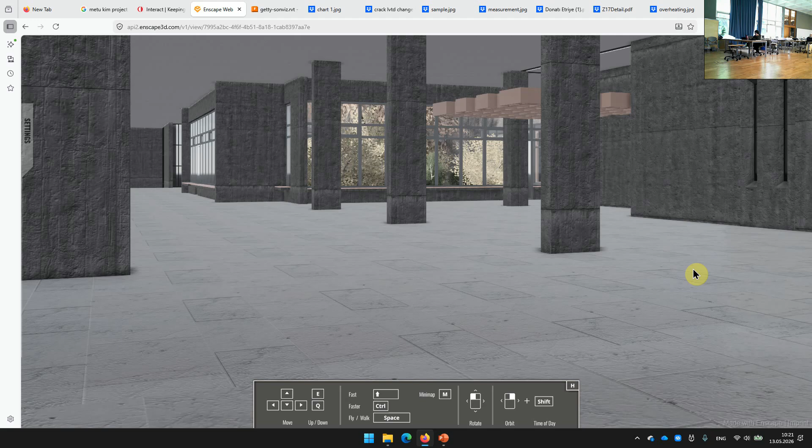This is the website, Kim Project, arch.metu.edu.tr, and Interact. This is for the general public, and it basically shows us what can be done with the Heritage BIM model.

In the tutorial today, we talk about this process quickly, but I'm not expecting you to replicate it. It takes time and resources, so you don't need to go for that. But if you're interested, you can install Recap Photo and take photos of your physical model, then convert them. You have to get it from Revit, Autodesk, for free. Then you upload your photos to the Recap Photo system, and they upload to the server, then bring you back a digital 3D model of your physical model. You can do that, it's fun, it's really good.

But today's tutorial is all about creating drawings, so it's completely different. I want you to create two-dimensional drawings with annotation like measurements, dimensions, text, labels, annotations, and sheets, and also create a 1/20 detail section. I want you to work on it like I did. I'm giving you some examples, complete it, and then create a PDF file out of that sheet.